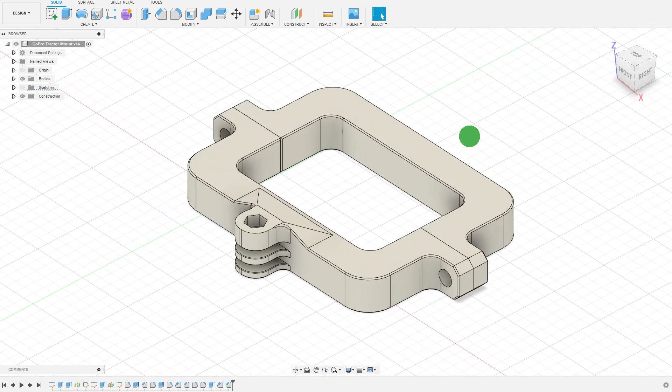Hey folks, I want to do something a little different today, and instead of walking through the traditional how to make a line, how to make a plane, real specific content, I thought I might try a different format here and walk you through making some basic changes to an existing project that I've got here. So this is a model I've already worked up.

It's a two-part clamshell mount for a GoPro on a Kubota ROPS, on a Kubota tractor. And the features I want to add are a couple of through holes essentially in this back part so that I can thread some threaded inserts in and then put through bolts to secure various other bits and pieces to this.

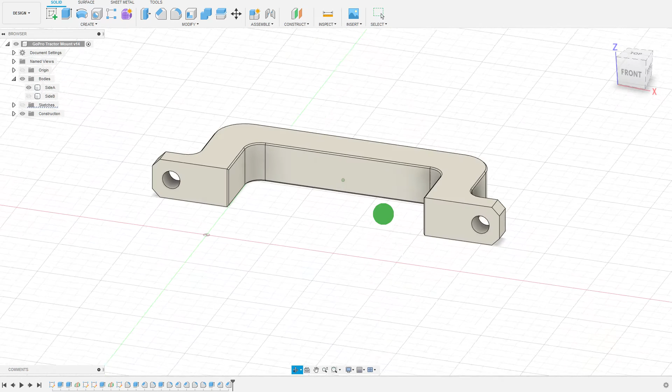So how are we going to do that? We already have a couple of things that help us out here. I've already got a mid-plane created. So one of the first things I'm going to do is create a sketch on this mid-plane. I'm going to select that mid-plane and hit Create Sketch. Now I want to center this all in some way that centers the holes, but also doesn't interfere with any of the other existing geometry I've got.

So I've got some geometry up here, and not that I'm going to necessarily push the holes through this part, but I'd like the option to do so. So in terms of geometry, I want to make sure I stay in the bounds of this rectangle here, this flat. And I also want to make sure I stay away from the mount feature up front here.

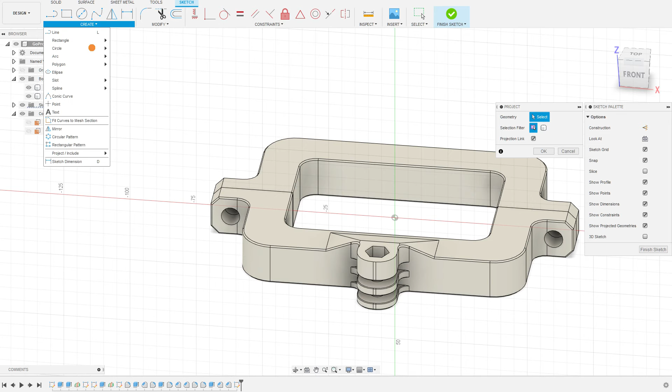So to do that, we're going to use the Project tool. I use Shift-P for that, but you can also get that from the Create and Project menu. I'm still in sketch mode, so I'm going to select this back plane and hit OK. We'll project that first. If we hide our bodies, you can see we've got a purple box, and the purple indicates that we used a projection link, which is what we want. That box represents the projection of this back rectangle onto our sketch.

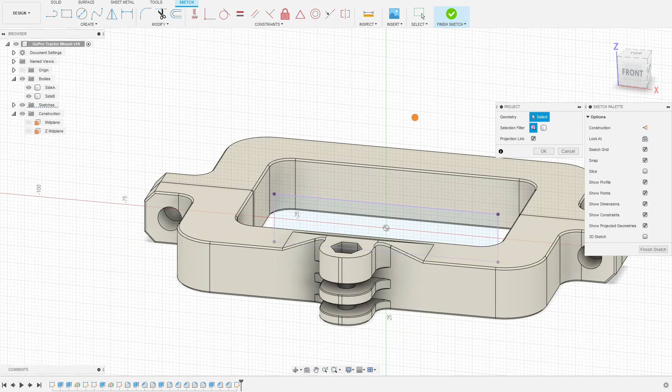We're going to do another project here, and this time I'm going to grab a couple features up front. I'm going to grab that line and that line. Again, keep projection link checked and hit OK. We'll see that we have these two lines in here. We're not really going to use these lines for anything specific other than for some reference.

All right. So let's create a couple of new lines, and these are just going to be some construction, some alignment lines. I'm going to get out my line tool by hitting L. And you can see this was added, I think, this year in Fusion, some snap alignments. As I approach the midpoint of this vertical line, that little triangle shows up, and that tells us it's going to create a midpoint constraint. So I'm going to click and release, come over, and we can see that triangle pop up. I'm going to do the same thing on the other side.

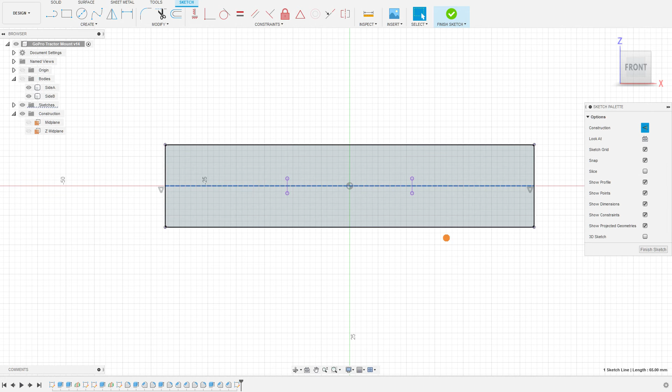I'm going to hit Escape to get back to my select tool. Now I'm going to click that line and hit X, and that converts it to a construction line. That just means that line will no longer show up once we're out of sketch mode, so you won't be able to extrude based off of it, which is just fine. So now we're going to make two more lines the same way. Because we see this little X here, it tells us we're going to have a coincidence, which is fine. And we'll do another one over here.

There's a little bit of lag in Fusion for some reason here. Haven't quite riddled that out yet, but it doesn't seem to affect functionality.

I'm going to hit Escape to get back to Select, select each of my vertical lines and hit X to create construction lines. Now we can see in terms of constraints, these lines cannot move up and down, but they can move side to side. They are constrained horizontally, which is exactly what we want. Now we want to center these between the bounds of our model. There's a couple ways to do that. We could take some measurements and define things, or we could use some dimensions.

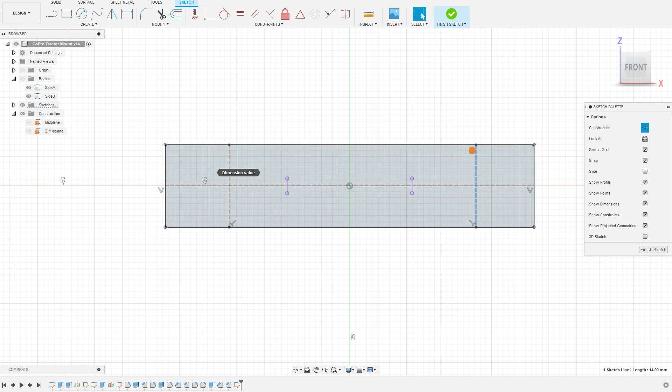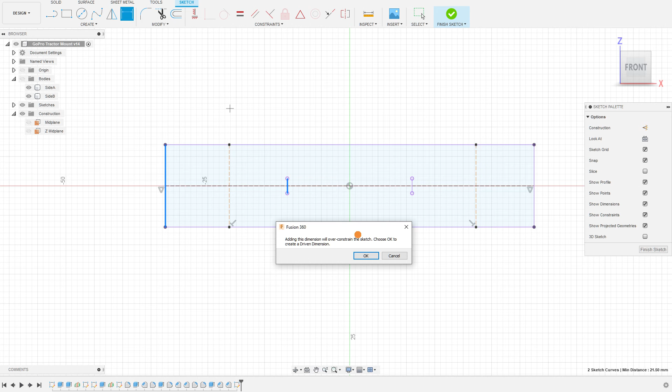So I'm going to hit D to bring up the dimension tool, and I'm going to click on the first projected line, and then I'm going to click on the middle line. And I'm going to pull this up here. And when I try to create it, it's going to squawk at me. And this is basically telling us that this would over-constrain the sketch. And it would do so because these purple lines are projected lines from the existing geometry. In other words, they already have a definition, and I cannot use the dimension tool to give them a dimension.

However, I can create a driven dimension, which is sort of a red dimension. In other words, it's going to read the existing dimension off of there just as a reference point, which is fine. That's really all I want. So I'm going to do the same thing on the other side, get the same prompt. But now that we have that dimension to reference, we can make additional dimensions based on that driven dimension.

So in order to center each of these lines, we can very simply measure from one of the outside bounds to our line. And now we're going to go ahead and click on the larger dimension and divide that by 2. And what that'll do, obviously, it'll give us a dimension that's exactly half of the distance between these 2 points, which essentially gives us a center. Now, there are a million other ways to center geometry within Fusion, but this is a relatively quick way to get it done.

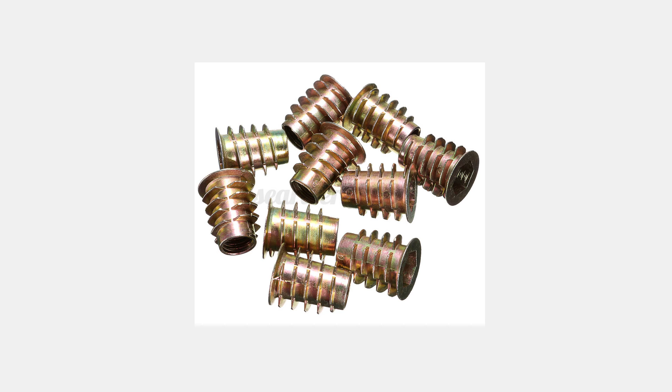All right. So now we've got that. We now need to create 2 different hole sizes. I'm going to go ahead and bring up my parameters. And I've added a few in here already. So UT_ is my sort of utility through hole. And these 3 dimensions are the ones that matter for me. Now, I'm going to be using a threaded insert and a 1/4-20 bolt. So my threaded inserts look like this. These are pretty standard inserts. You get them from McMaster or Lowe's or whatnot.

They're intended to drive into wood, but they work pretty well on 3D printed parts because they have such a big bite. Now, there's a few features about these that are a little strange. One is they are tapered. So in order to account for that taper, we could certainly create a conical recess, but instead what I've done is taken a dimension a little higher up than halfway up as the diameter, so that the first portion will go in without much resistance, but then we'll tighten up toward the end, and that's just fine. I've also taken a total height measurement off of these.

So coming back to Fusion here, our insert depth is that total height, that was 12.5 mil, and our insert diameter was 8.1. Again, that was part way up the insert. And then the 1/4-20 bolt that I'm going to be using is just about 6 millimeters, so I'm going to go with 6.1 to give it a little breathing room. Now, with these done as parameters, it's nice because when we define our sketches and models based on these parameters, if it turns out that we print it out and it ends up being wrong, all I have to do is come back and adjust these parameters, and it will adjust the model accordingly.

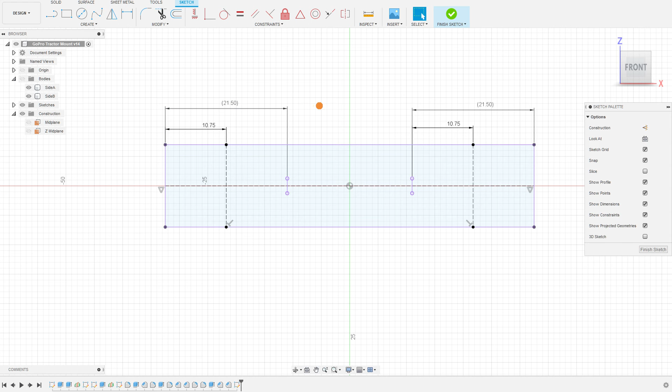So we're going to go ahead and create 2 sets of circles at each of these intersections. So I'm going to hit C for my circle tool, but you could also grab it from the sketch bar up here. And I'm going to zoom in a little bit. And I'm just going to hover over this, and I'll get my little midpoint thing, which will tell us that we're going to intersect and be midpoint and coincident with these lines. I'm going to click. And now in here, I'm going to type UT, and I'll bring up my little quick select menu. And first, I'm going to do my bolt diameter. Hit enter twice. So now we can see it says FX. That tells us that essentially we are defining this based on something, a function, whether that's a parameter or some other dimension.

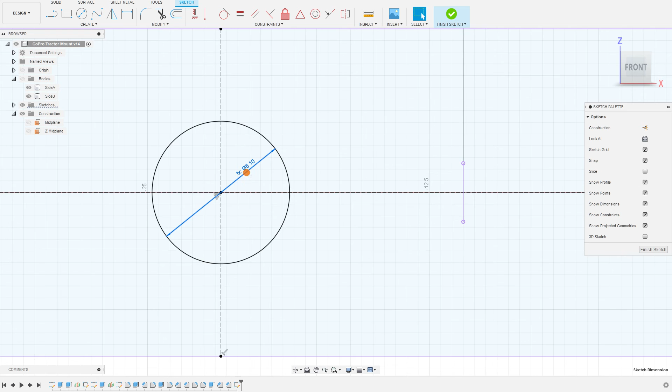I'm going to hit C again. I'm going to hit that center point again. I'm going to draw it out. Type in UT, and this time I'm going to put in the insert, the bolt, did I use the bolt diameter? Oops, let's do the insert diameter, excuse me. There we go. So we have our 2 different dimensions there now. I'm going to go ahead and do the same thing over here.

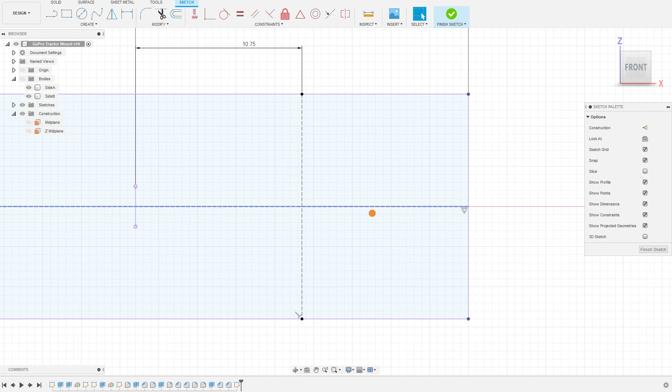Okay. So now, from a geometry standpoint, we've got everything we need here. We have our 2 circles, our 2 diameters, right? One for the through hole and one for our recess. We have those well defined. We have them where we want in our sketch. So I'm going to go ahead and hit Finish Sketch now. I have to show my sketches again.

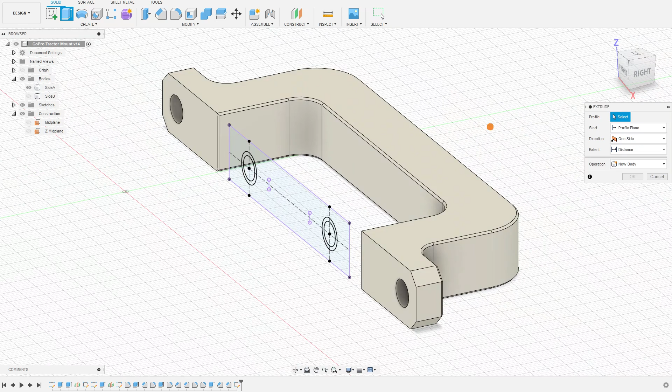So now we're going to go ahead and start doing some projects. I'm going to hide side B because we're not going to work on that one for now. So we're going to do, rather not some projects, we're going to do some extrudes. So now we want to do a couple of different extrudes, and I wanted to make this mid-plane based because it gives a good chance to talk about doing extrusions with various offsets. So I'm going to hit E to bring up the extrusion tool, and we will start with our through holes because those are sort of the easiest.

I'm not holding shift or anything, I'm just selecting my 2 through holes. Now there's a couple ways we could do this. We could just drag this all the way through to some arbitrary number and cut the whole way through. And that would technically work just fine, but it's a little bit of a messy way to do it, and we can be more specific how we do this. So we can do that by going over here to our start, and this is essentially the point from which we are going to start our extrude.

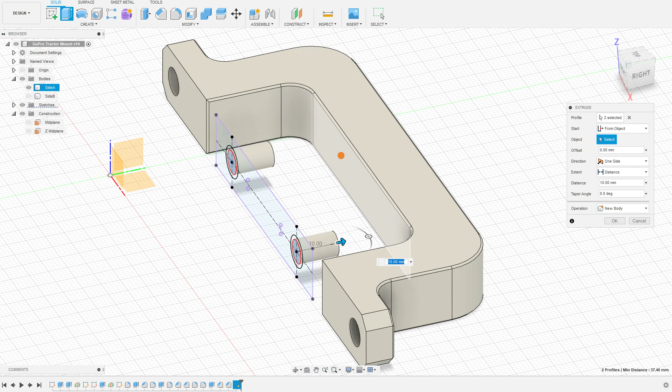And I'm going to say from object. And in this case, I can actually choose the plane that I want to start cutting from. So I'm going to start cutting from this plane. And now very simply, we're going to say offset of 0, direction one-sided. And our extent, in other words, how far are we going to make this cut? We're going to do another to object, and I'm going to select the other side. And now we've got our holes that are being cut confined specifically through these faces. All right. So I'm going to make sure that operation is set to cut. And then we're going to go ahead and hit OK.

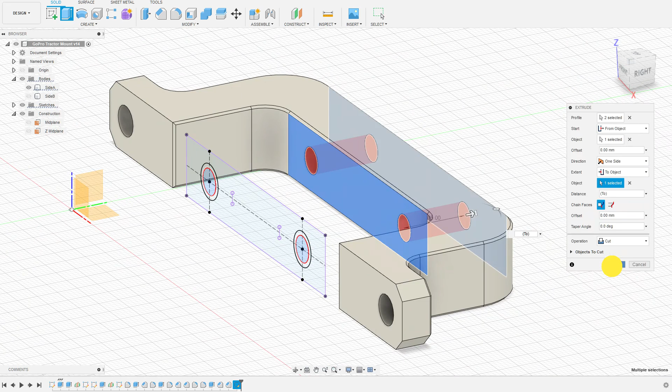Now we want to make our counter bores. Now our counter bores are not going to go the whole way through the piece. And in order to do that, we're going to do a very similar thing to before. We're going to bring up E for our extrude menu again. I'm going to grab these counter bores. Right, these are for the insert diameters. We're going to do similar to before. Our start is going to be from object, and our object is going to be this plane again.

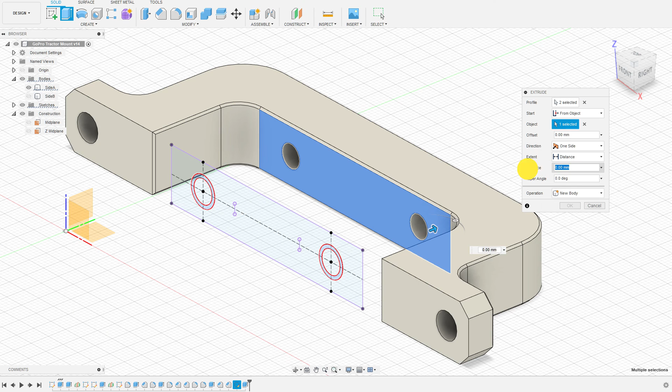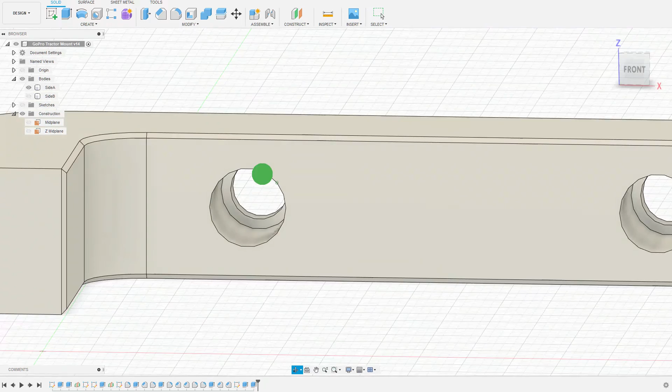Now the difference is our extent is going to be a specific distance because we don't want to go all the way through. We're going to use our parameter, and we're going to go our insert depth. And now what we'll see is that's going to cut our insert not the entire way through this part, but the majority of the way through it. Okay? We're going to go ahead and make sure this is on cut and hit OK. And now if I hide our sketch, what we should see is we have some counterbore holes that will allow our threaded inserts to come in through the back, and then when we thread our bolts in through this direction, they will pull against this shoulder.

Last couple things to do here is add some quick additional features. I'm going to add a chamfer to both of these edges here. And it's going to be a very small chamfer, 0.5 millimeter, just enough to sort of guide any bolt that I'm trying to thread in there. And then on the other side here, I'm going to add a slightly larger chamfer. And the reason for that is these have a pretty large flange on them. If you can see the flange here, that comes out a pretty good distance. And that flange is also asymmetric. It doesn't have a 45-degree angle. So we're going to make an asymmetric chamfer.

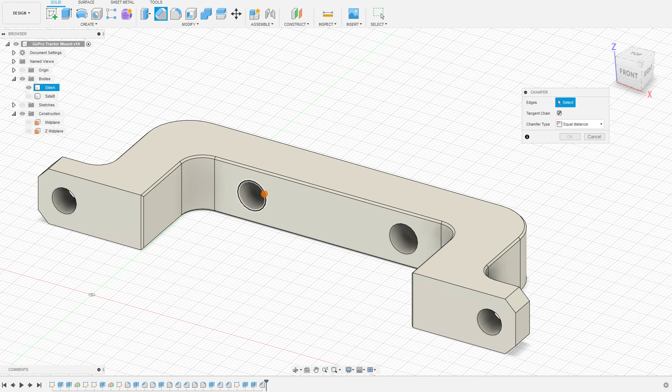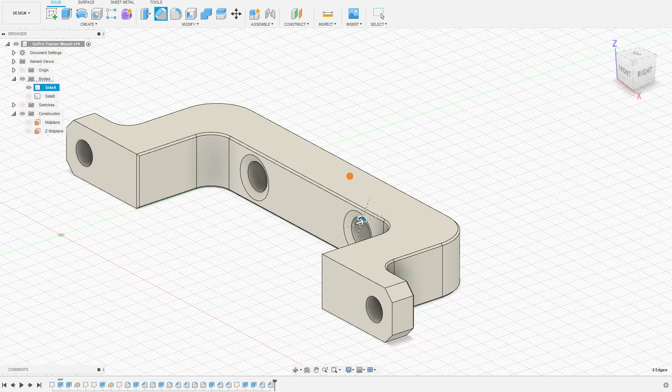So we're going to select our chamfer tool and select both our surfaces. Now we're going to say chamfer type. We're going to change this to 2 distances. And Fusion is having a little bit of a hard time here. Let's try that again. There we go. Change this to 2 distances. And just for giggles here, we'll change this to 1 and change this to 2. Now that gives us the opposite of what we want. We want one that is essentially wider than it is deep. So I think a 1 millimeter deep, 2 millimeter wide asymmetric chamfer looks pretty good on those. We'll go ahead and hit OK. And we're done. So that gives us now our counterbore holes that we can push our threaded inserts through on this side and be able to pull our bolts through on this side.